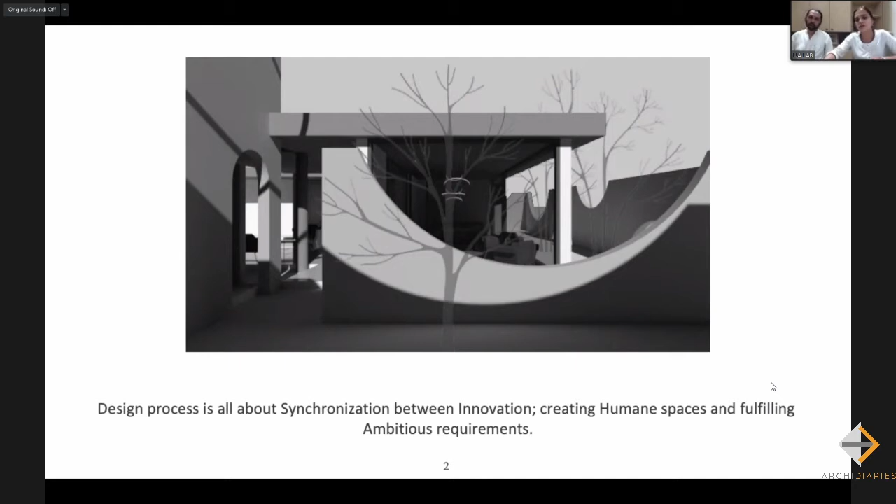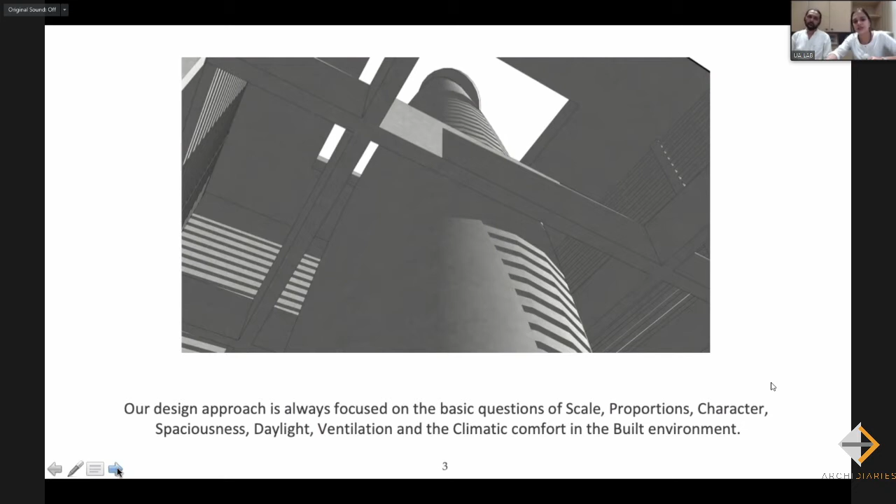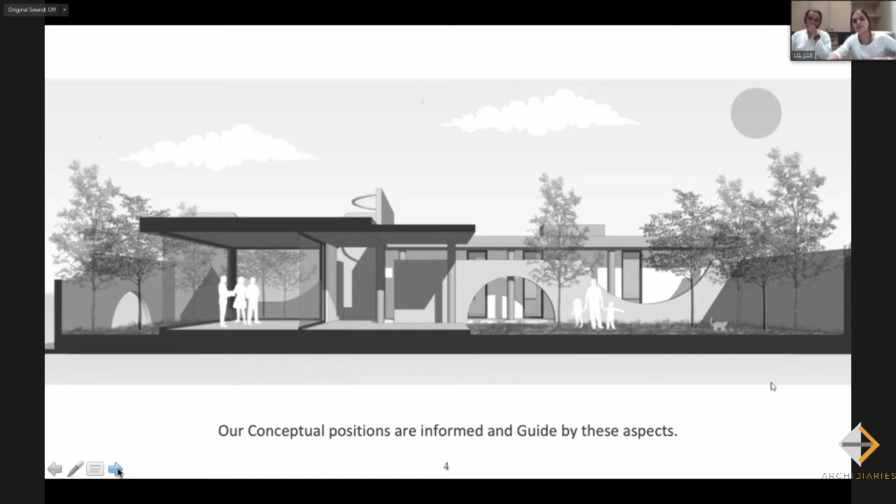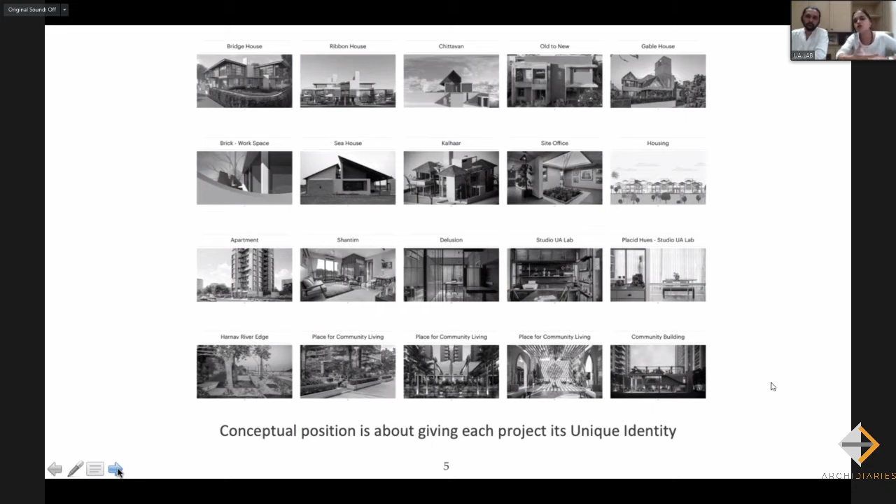Just one sec. And it is under this environment that each of the designs tries to shape itself and gets a unique identity. And this is how we try to work and develop a particular methodology for each of the projects. And this is a compilation of a few of our projects where it is more like an effort to create a unique identity, giving each project its value and its character in terms of its requirement and the context where it is placed. And here today for this particular presentation, we are trying to compile a few of the projects which are of varied scale. And in each of the projects, we are trying to discuss the kind of method that we have, that through a particular approach, what are the different methods that we try to evolve. And we use drawing as an important tool in order to develop these designs.

So the first project that we present to you is the Harnav River Edge. The project is about an urban park. It's in a place called Khed Brahma, a small town near Sabarkantha. This particular piece of land was actually used as a dump yard, and Khed Brahma municipality decided to develop it into a green space and park for the people there.

Harnav is also a non-perennial river, so the water can only be enjoyed during the rainy season. So it was a challenge for us to develop this particular place where water is non-perennial, and at the same time to create some interest value and an attraction for people to come here.

The way we started working on this design, the conceptual idea was evolving around the entire edge, which was parallel to the water body, and we thought that these linear pathways or linear strips could be of interest value. So the very initial sketch was to make these linear pathways which would run parallel to the river edge, and they can form interesting spaces.

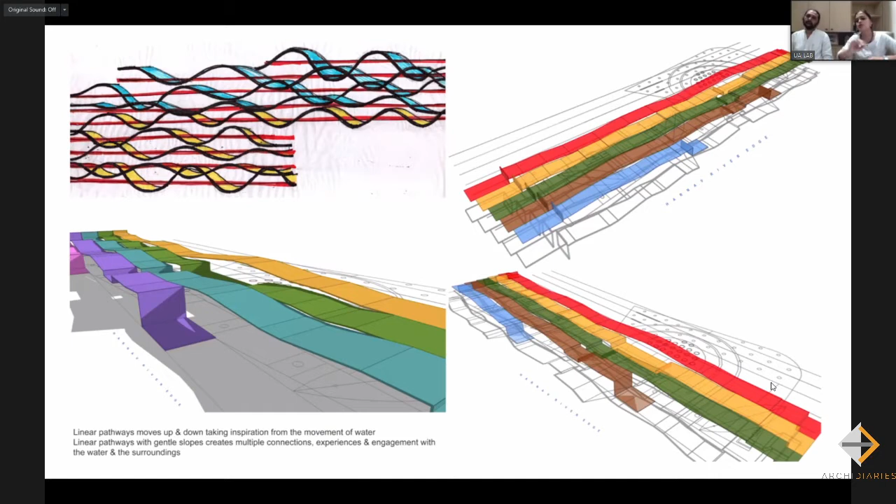If I link back, these actually are pathways which will run parallel to the water edge, and they form different kinds of spaces which are of interest value for walking. At the same time, they form different spaces where one could sit, and sometimes they get converted into bridges.

On the plan, it is a series of these linear parallel walkways, but it becomes quite interesting when seen sectionally. It creates different kinds of connections to the entire space, because one keeps on walking up and down through a series of these linear pathways.

We tried giving different pauses which would connect these linear strips together. Somewhere these pauses get converted into an entire lotus pond, somewhere there are pauses of green spaces, somewhere they get converted into amphitheaters. It is through these pauses that these linear strips get connected and create interesting spaces around the entire environment.

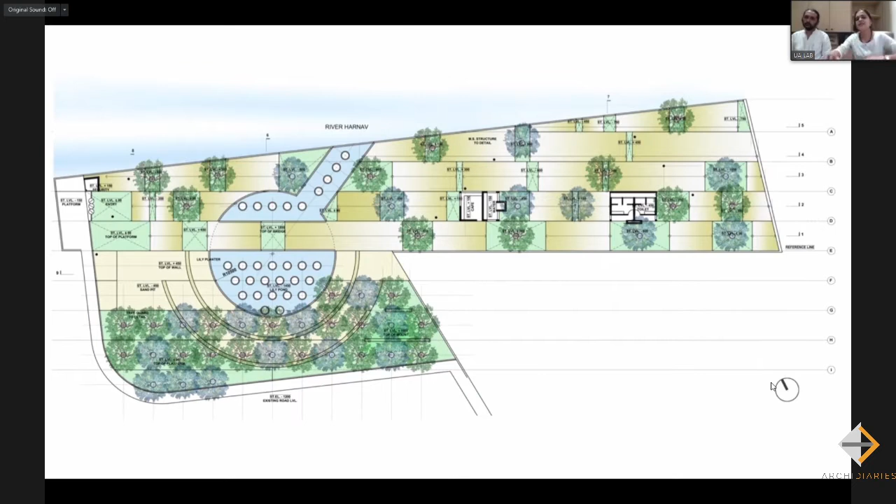It was interesting to solve this, but at the same time it was a big challenge, because the moment you put something linear up and down at different levels, channelizing water becomes a big challenge. There have to be valleys and ridges formed so that the water could be channelized.

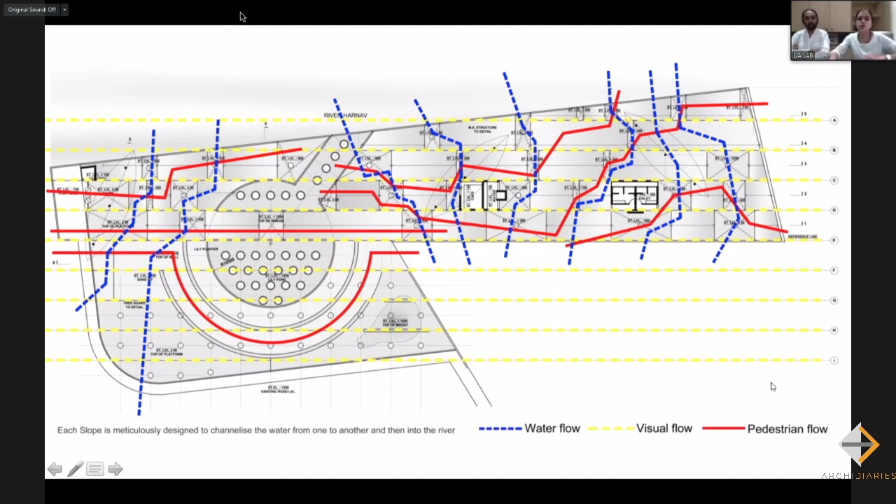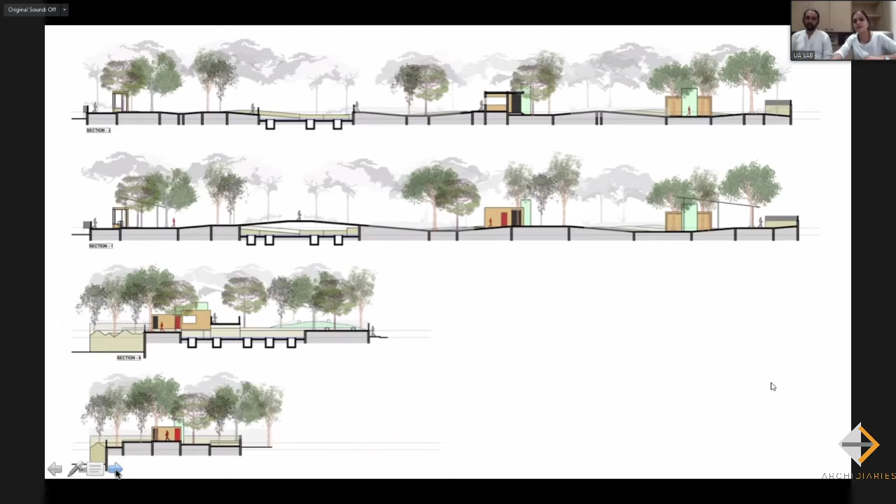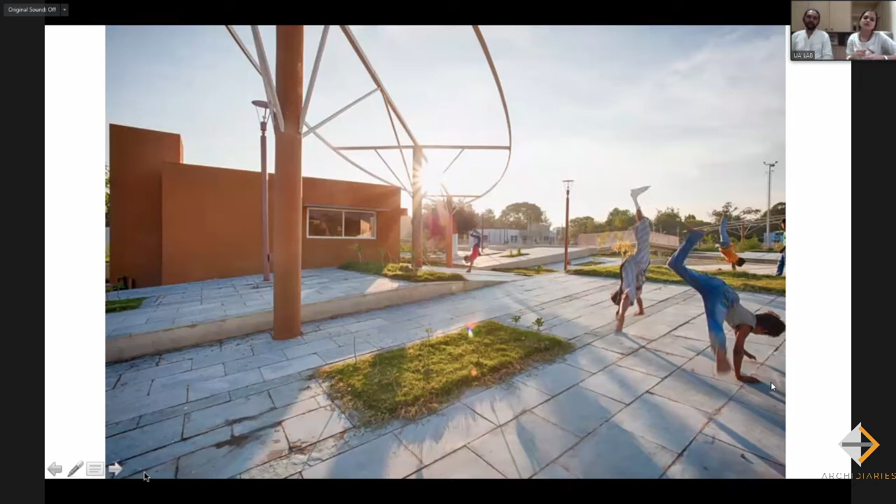This is the same place where also these pauses, the way they are designed such that there are all these linear strips that run parallel. And the space frame and the pauses are positioned such that they help in tying these linear strips together.

So even the space frame is diagonally positioned so that one can also move from one slope to another. It provides a direction for one to dissect through these spaces. At the same time, the space frame helps in tying these linear slopes together. This is a photograph of the same.

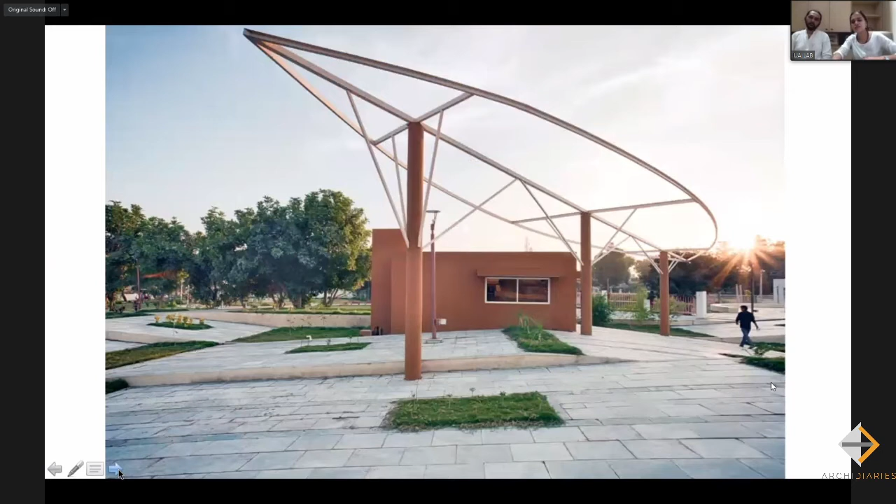These are the pauses that we were talking about, and these are the places where actually the water can get channelized and can pass from one particular linear strip to the other one. And so even if it gets collected, it can be used for those green spaces in the plantation area.

It's a photograph of the same where all these pauses and lawn areas are created. And this is the site where the Harnav River runs. It's a photograph of the same during the evening time.

And it's a park which is being used extensively because in Khedbrahma, most of the public spaces are more associated with temples. And this is a place which gives an opportunity to be like a picnic spot or even for kids to come. And it is because of this particular element, the entire park gets a new life or a new interest to come and visit this place.

Here, the second project that we would like to discuss is about community space. This project is in Ahmedabad, and it is about the community space in a residential complex. This project had a fairly simple client brief in terms of developing the open spaces in the residential apartments, in the residential area. As you can see, these are the buildings, and these were the patches of open spaces that were given for us to develop.

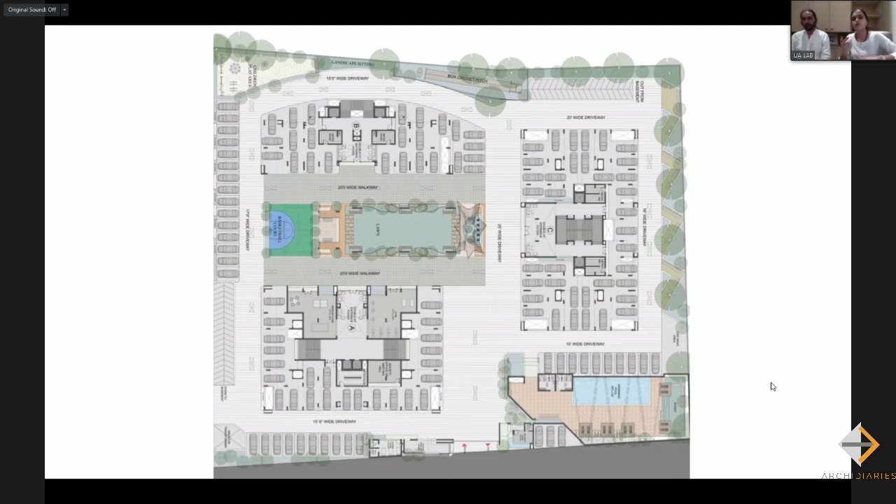However, I would just like to share that it was not all that easy, because if I reshare this proposal, the moment I take the hollow plinth areas, all the car spaces are the ones which I need to balance. Also, I need to rework on the entire ramp movement of connectivity to the basement. So it was not only about creating these spaces, but it was also statistically working on giving back the car spaces, because there are particular number of car requirements for all these kind of residential societies.

So in order to materialize this plan, we reworked on the entire vehicular movement. We changed the ramp, the position of the ramp, so that the vehicular movement also could be clearly articulated, and meticulously counted each vehicular park space so that we can take away the hollow plinth area to create semi-open spaces which could be connected to the garden. And this is how we were able to convince the client in order to give us some of the hollow plinth area which could be worked with the open spaces and lawn areas.

And then we started working on designing of each of these pocket spaces where there is an entire entrance. I'll get into the details of each of them one by one, and adding different activities and different zones, because these kind of residential societies have different age groups and they have different demands.

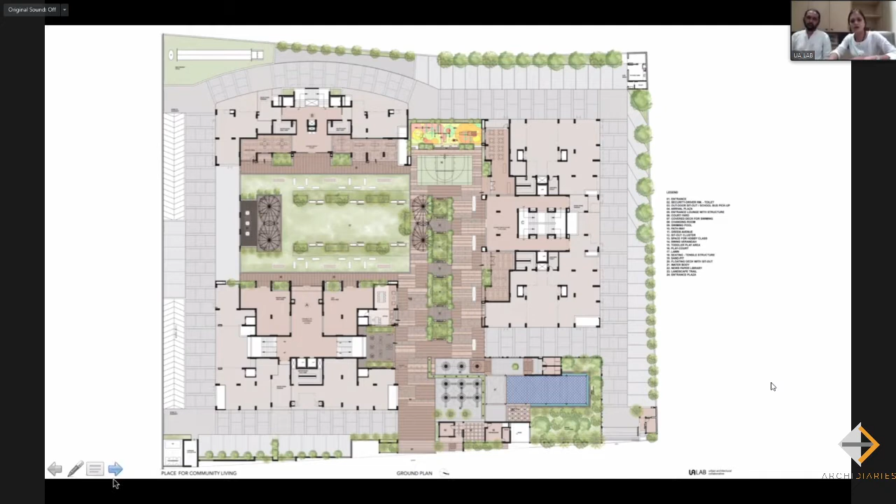However, it was pretty interesting, and we started going one by one, where we really enjoyed working on this, where we started taking each of the pockets and trying to detail out and give each pocket a particular identity in terms of water feature, or in terms of vertical planters, or in terms of more shaded green spaces, in terms of different kind of sitting areas that could have that identity. So people staying there will start associating these spaces with these kind of elements, and hence they can get connected more.

So this is one space where there is an entire water body in this particular area. You have the sitting, and then you have a canopy. It's a tensile structure, and there is shade there. And here, from the sitting area, one can actually have the entire vista of the central court. And on the two sides, you have the building. So this happens to be sandwiched between the building area. This is one pocket.

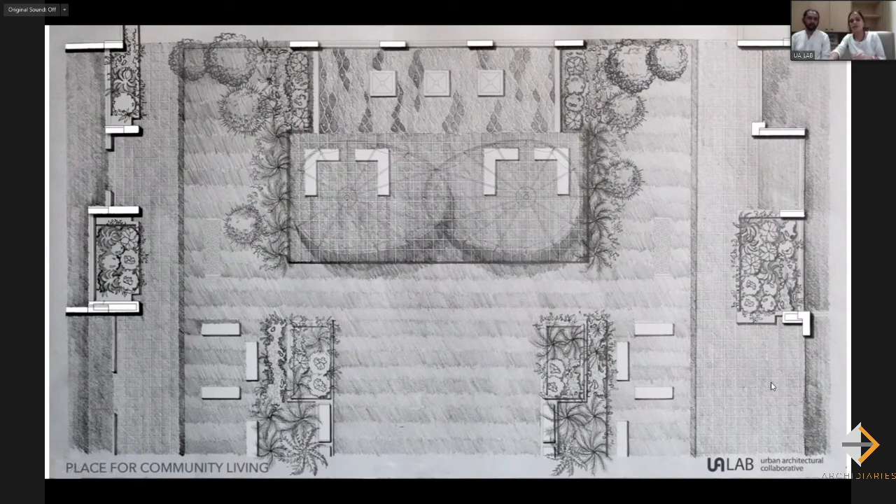This is the second one where it happens. It is directly at the entrance, where this is the security cabin area. And here there are series of vertical planters which are of different height, and hence the intershading creates a very interesting space in the front. And it also has plantations which are creepers. So and the creepers also have different flowers, and hence the entire place is not only shaded, but because of the vegetation and the colors and everything, it gets a very different identity.

And this is the pool area, where obviously the swimming pool area in the residential society also requires different kinds of privacies, different layers of privacies, which we were able to achieve through the thick plantation. At the same time, plantation also adds value to the entire water feature.

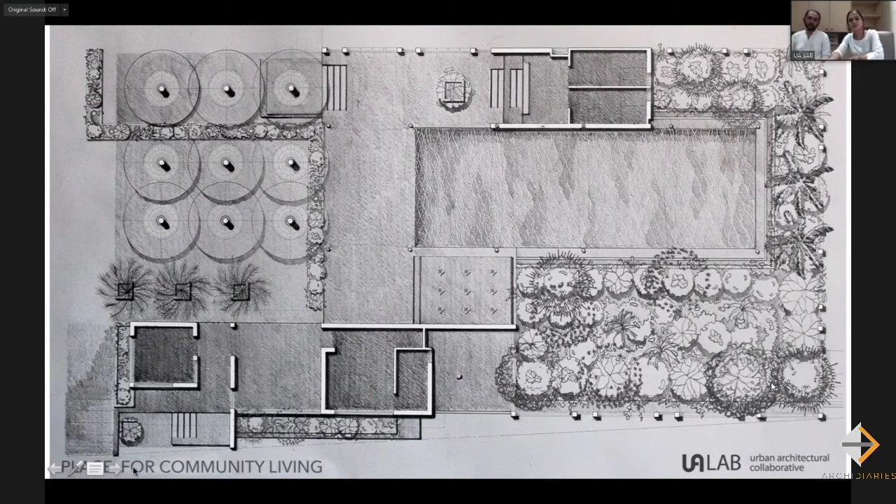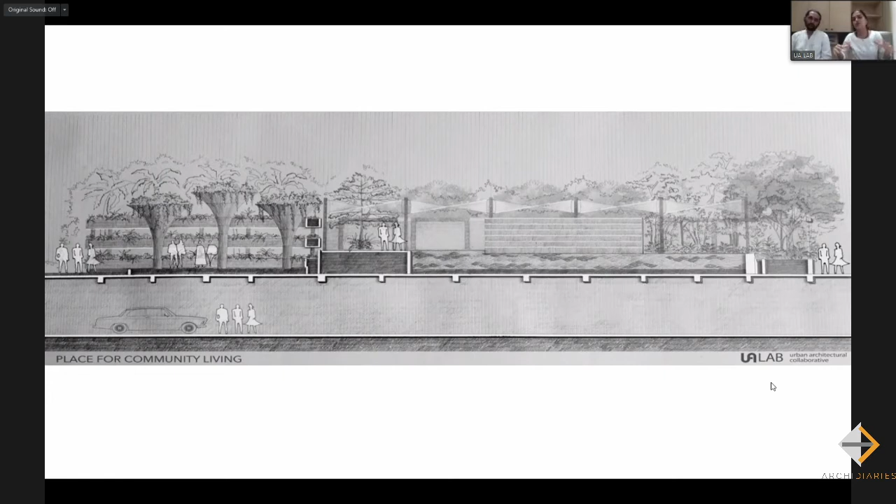Here, I have specifically shared this drawing. This is the entrance area drawing, where there are a series of vertical planters in this area. There is the swimming pool over here, there is a thick green, and this is the entire security cabin area.

Here at UA Lab we use working drawing as an important tool for design development. It is not only a drawing for construction, but working drawings are a tool through which the entire design starts developing. At this stage we were very clear not only about how the entire structure will come up, but also about each and every pattern the flooring will take, the pattern that will come up on the vertical walls or on the frames, and what materials will be used. It is through this language that we are able to harmoniously connect all these spaces together.

So initially, when I shared that it is about integration, integration is not only about physically connecting it and making a whole space, but also about connecting all these verticals, horizontals, small spaces, big spaces, having a similar language of material, patterns, and color palette. This ties the entire space together, though they are happening at different levels and positioned at different places.

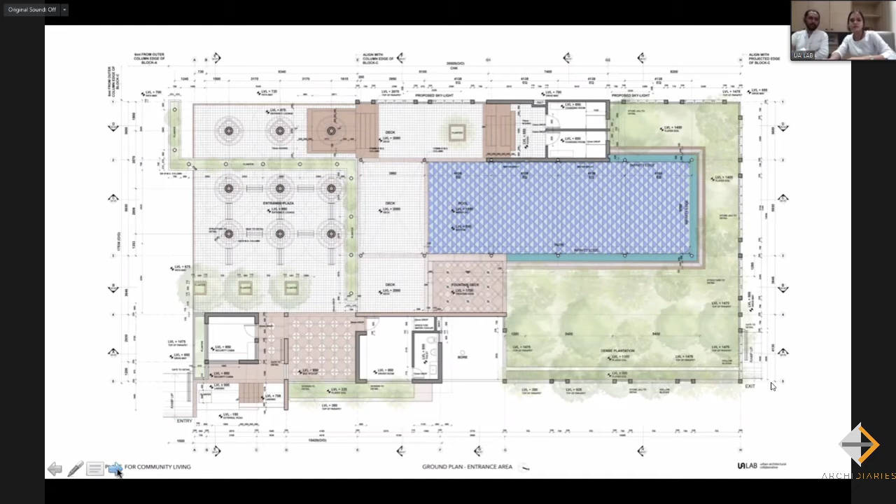The creepers and vegetation are specifically selected to be of hardy varieties. They remain green throughout the year and are low maintenance.

As I was sharing, the working drawing stage is the most important stage for us. It is through this that we try to develop the design, and this drawing specifically shows how any pattern on the floor ties together, and similarly how the pattern happens on the vertical part. These are the vertical planters, and these are the fins, where part of it encloses the swimming pool and part forms the compound wall for the society. Everything is resolved at that particular stage, which gives a holistic value to the entire project.

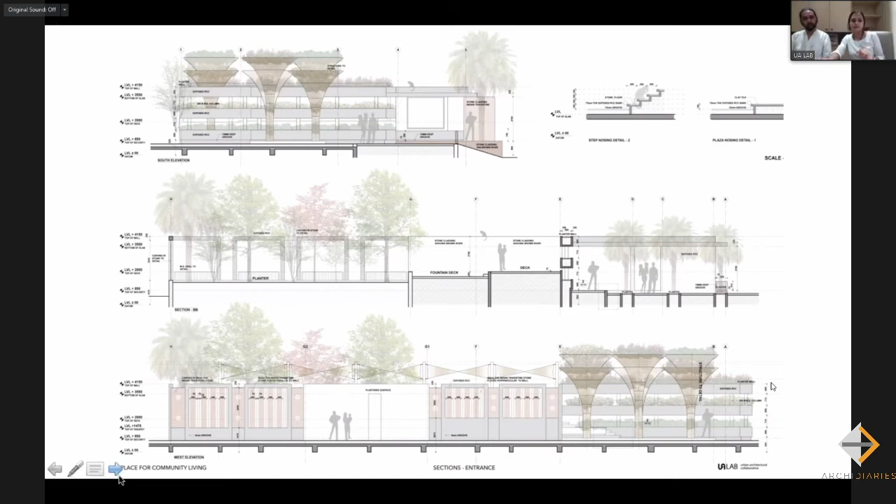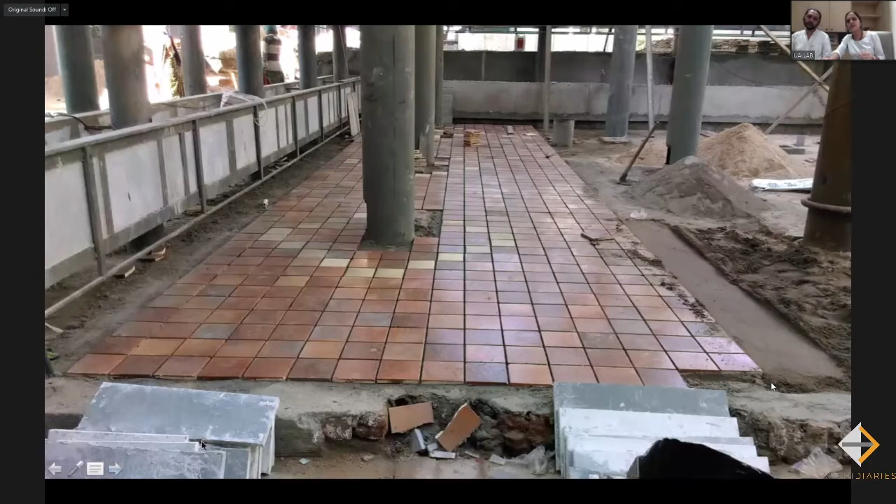These are some of the photographs during the construction stage, which I thought would be interesting to share. These are the fins, and these are the handmade tiles, and these are the vertical planters.

This is the swimming pool area, and these are the walls with stone cladding. This is a central lawn area with planters and sitting, and this is the water body, where here too I would like to share that the patterns and the size of the tile are all decided so that it holistically links to the entire project.

Even here, below it is the basement, so we have to provide light to the basement, so there will be cutouts in that slab for light and ventilation. These are the cutouts we have provided in the slab, and we follow the same pattern in these cutouts too. There will be a jali on top, and the jali has the same pattern that is used for the stone cladding.

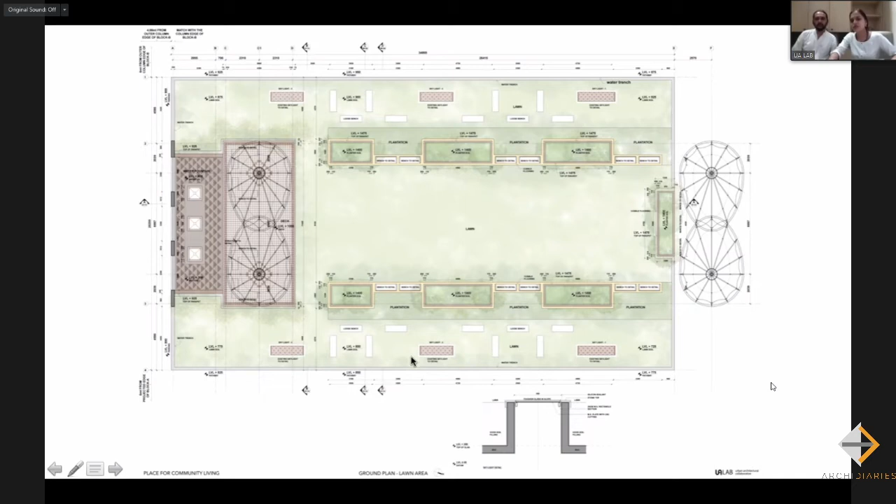The pattern that is on the jali, which takes light from above, the same pattern is repeated on the stone cladding at the backdrop of the water body. We were quite clear from the beginning that the patterns are not arbitrary. There is a selection of a particular pattern, which is scaled up, scaled down, and combined together to make another design, but in a way they link together.

Everywhere, whenever you are moving in the entire community area, you are able to relate. So it is not something that arbitrarily comes up. Whether it is a floor, a screen, or something on the stone, they all have similar kinds of motifs with different scale and proportion, combined together to form a different pattern, but still the concept is the same.

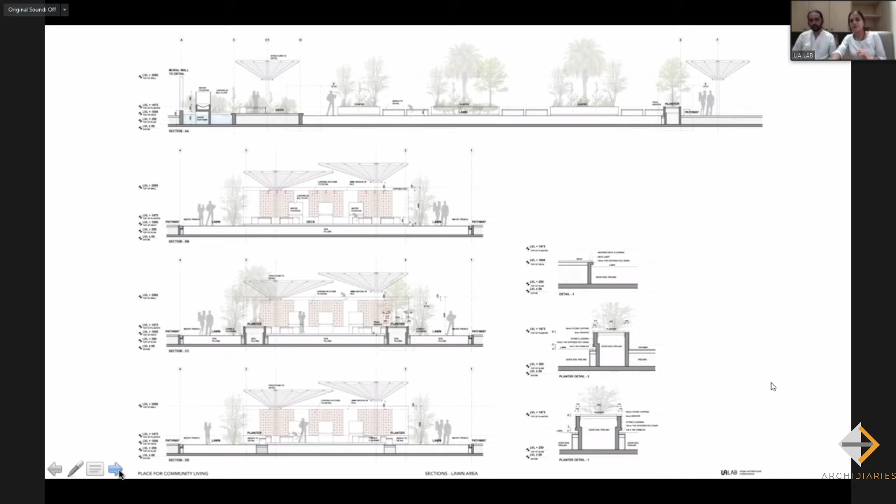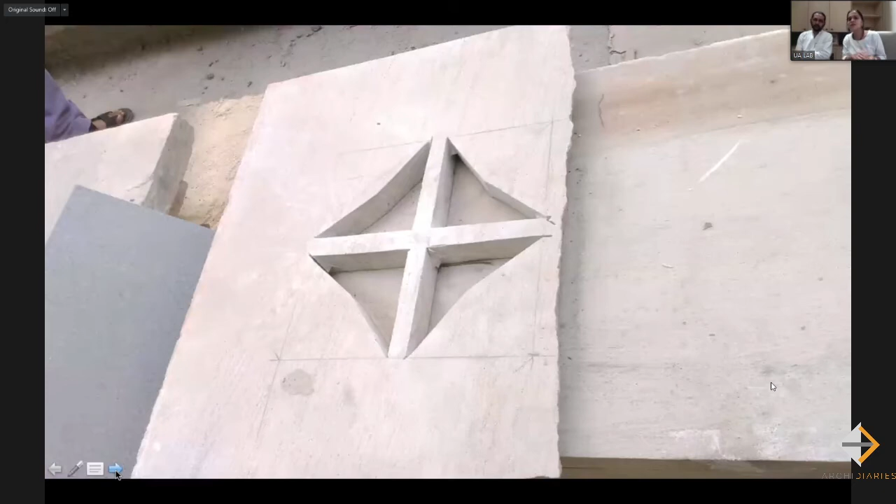This is the stone, again Indian travertine, and this is sandstone on which the carving is done. This sandstone has been used for the vertical cladding, and this is the backdrop of the water body.

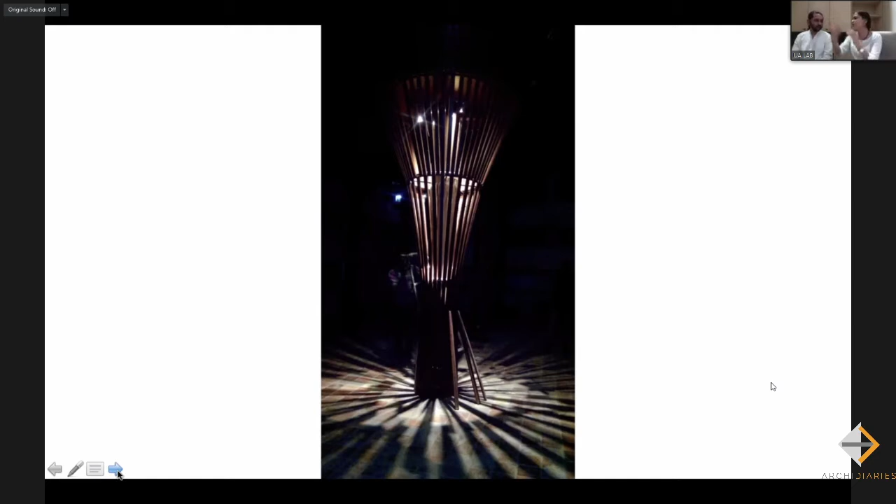So the height of the light should be placed a certain way, and that's how, at the end, we were able to get complete light circles for these vertical planters. The light fixtures in each vertical planter are positioned at a particular height, so that each one has a good circumference with a good spread, and the entire lower surface could be interestingly seen.

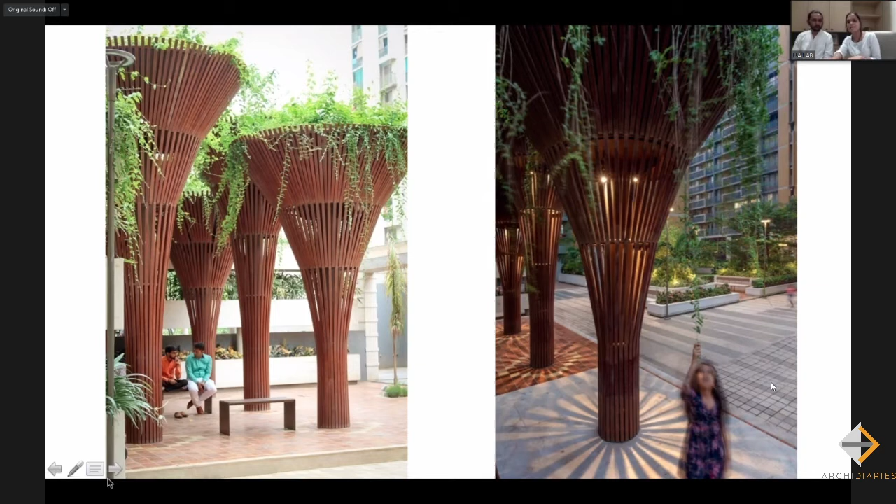These are photographs of the complete project, the same one I shared during construction when we were able to see just the planters. It's also because of how the vegetation and plantation is selected, based on different heights. This means at eye level, one is always able to perceive greenness, because there are varieties of heights for each plant species selected, based on the heights they grow when mature.

These are the pockets of sitting spaces, and even the pattern that is on the flooring here is the same pattern repeated in the entrance area.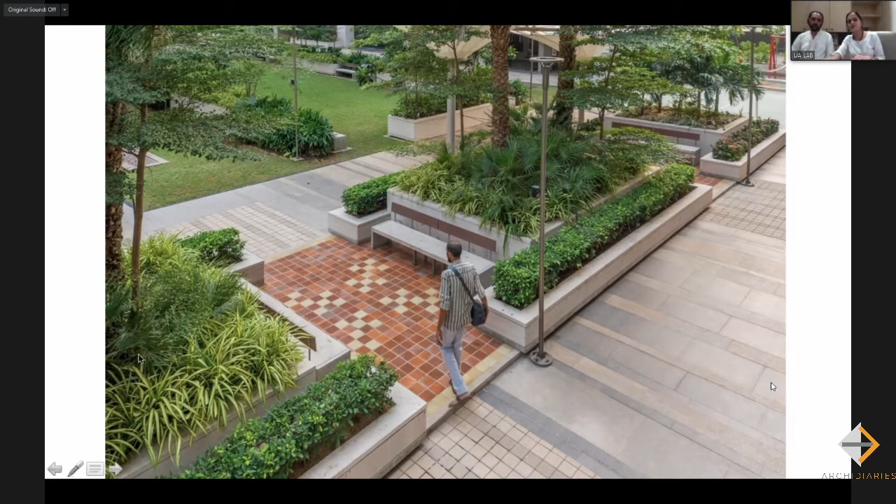This is the main lawn area, the central lawn area with the water body that I already shared in the beginning. And these are the planters which are taking the bigger plants and shrubberies.

And these are the hollow planes which we had convinced the client to take. These were initially reserved for parking. And eventually we were able to convince him, and these hollow planes are used as a swing area now. From this area you can directly see the central lawn area.

Also, just to add on, all these backdrops, we ended up using jali because it's good for air direction there. So there is a parking that happens on the rear side, but we have not gone with enclosing it with a solid wall. There are all jalis that are made. So all these hollow plane spaces are completely airy and have good ventilation throughout the entire day.

These projects that we shared were more like community spaces, parks, trying to cater to lots of faceless clients where the requirements are more generic. And now I move on to a specific private residence, a project called Gable House, which is in Ahmedabad. Here also the requirement is fairly simple: the client required 3 sleeping spaces with living, formal drawing, dining and kitchen spaces. The plot is a rectangular plot, and it sits at a cul-de-sac.

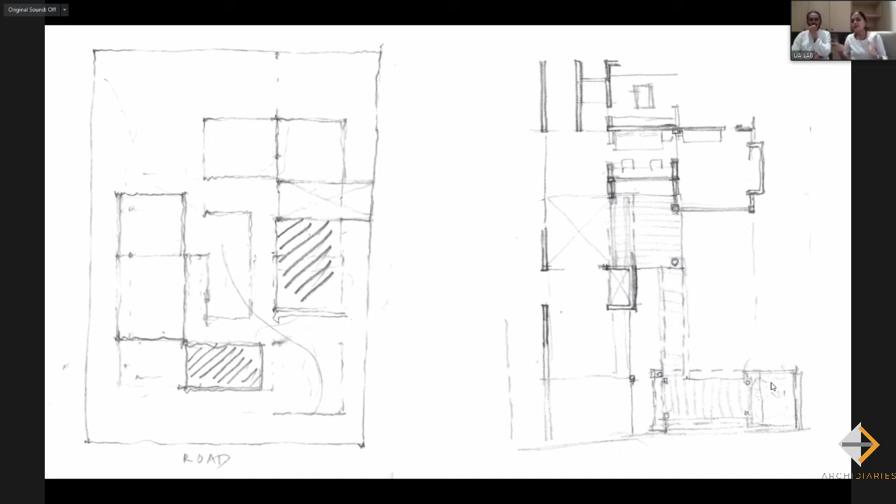And these are some of the options of the same. Normally when we have a project, both of us work on different options. This was one of the options that worked out really well that KK worked on, where the entire linear mass was punctured in the middle and green spaces were taken in. This middle space is where the mass is punctured, and open spaces are created on both sides: on one side it happens to be the garden, while on the rear side it happens to be a courtyard.

And this space ended up becoming the most important space where, with double heights and single heights, we thought it could end up into a very interesting volume. As that space was open, taking green from one side and having a court on the other side, it could have more daylight through the entire day and be a more interactive space. That's how we thought it could become a family and dining space, the spaces we tend to use during the entire day. The front side would take the formal spaces, while the rear side would take private spaces like sleeping spaces, kitchen and utility area.

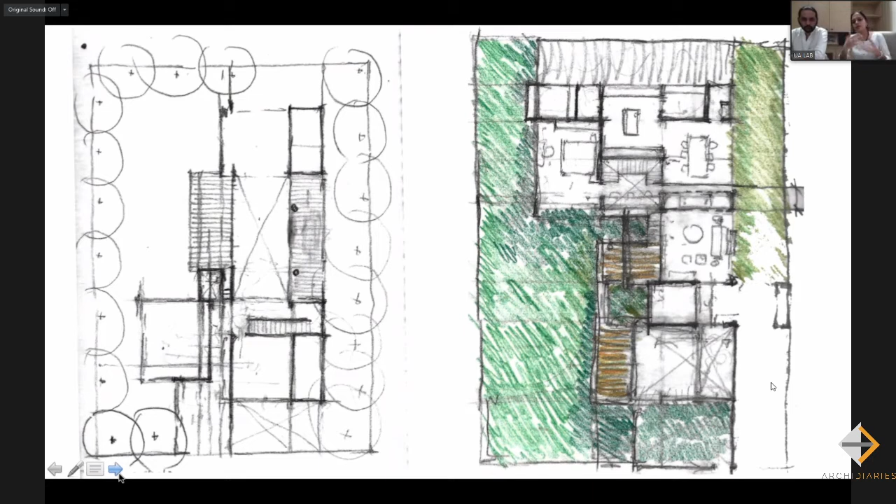These were part of some initial design process and exercises. What eventually ended up was a layout which is more linear, having a good strip of green which runs parallel, and a parallel mass taking all functional spaces of the house: in the front there is a living room area, followed by an entire double height volume which takes the family space and the dining, and on the rear side is a kitchen and then a bedroom, a sleeping space. And that's how the plan got articulated.

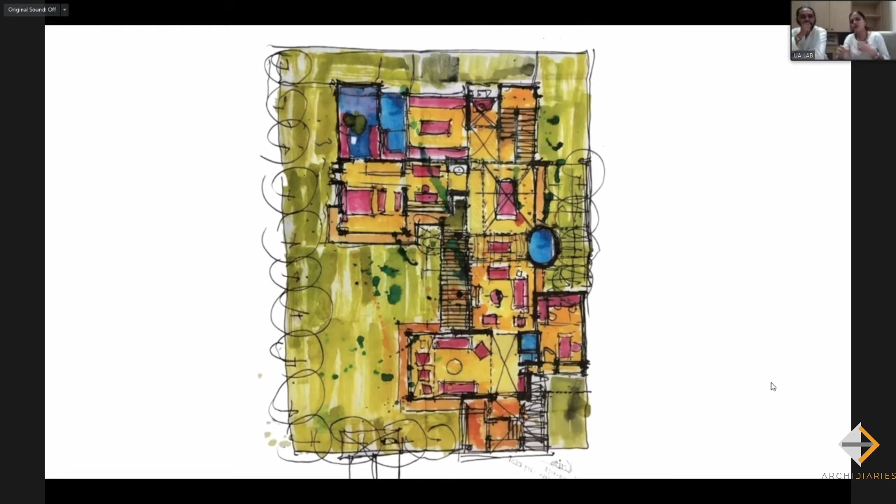It was also during this stage, while we were working on the plan, that it was clear we were able to get a series of single height and double height spaces. And we wanted to use these double height spaces to our advantage in creating interesting volumes within. This is how we started, where sometimes MS could be used to create interesting volume, different from something like a flat roof. And these are also some of the explorations of how the section could be worked out for the single height and double height spaces.

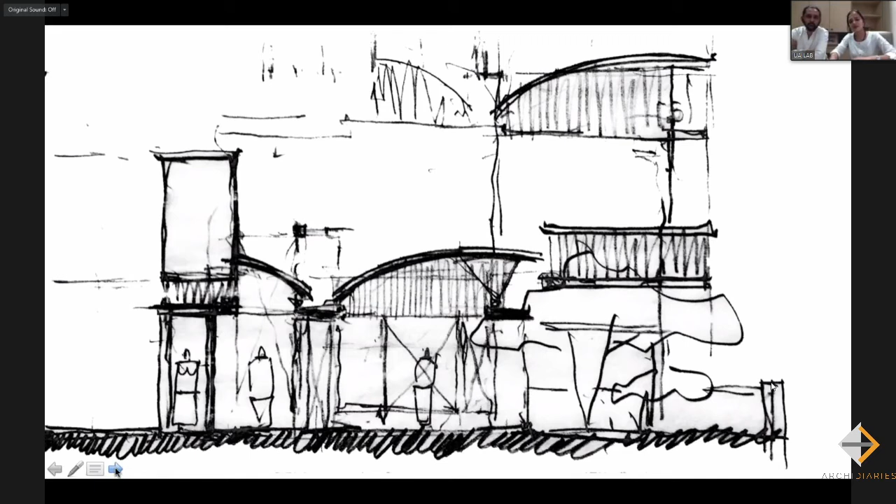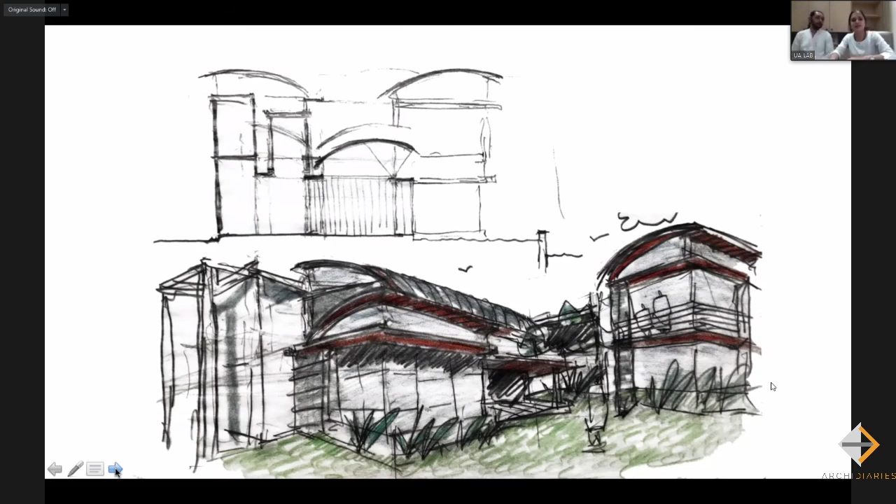These were some very initial sketches in order to work out how the entire volume could be shaped up after getting double height and single height spaces. And eventually,

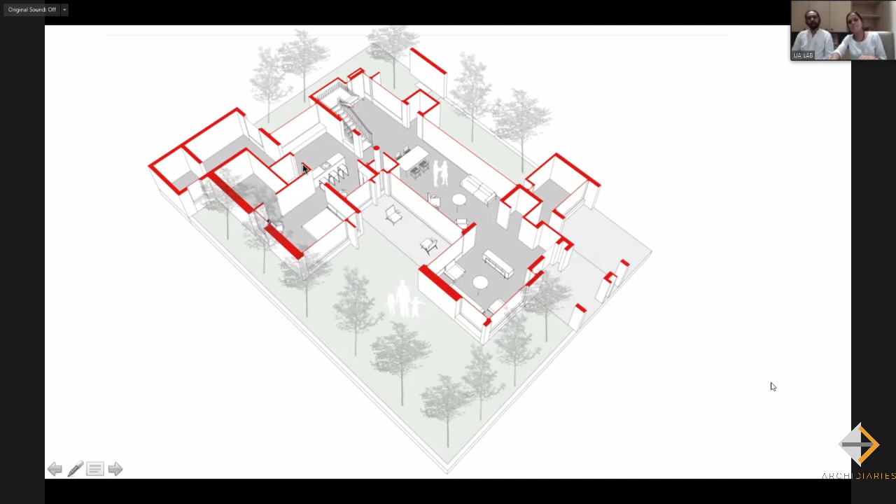And as I shared earlier, we really wanted to explore the entire volumetric dimensions. We ended up with the gable roof, and these gable roofs were designed more like floating roofs, where the entire front mass is lower, and as one goes deep in, it gets double height. And then in the front there is an entire tower, which is a vertical tower.

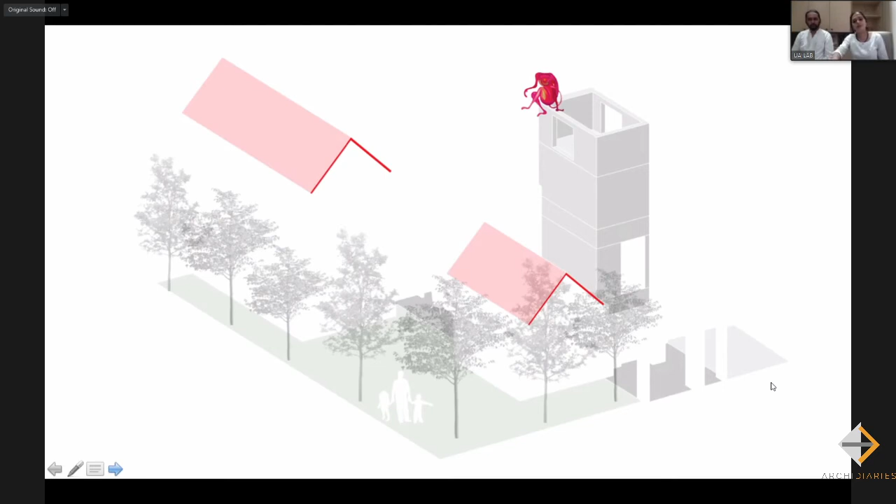So what I'm sharing in this section is that there is a contrast right in the front elevation of the entire house, where there is a single height space, and then it is connected with an entire tower which is almost triple height. And this creates a very interesting volume and interesting form from the street side.

At the same time, from the inner space, the living room gets a different scale because of the single height. And this particular area is where one actually enters into the house, and you are in fact greeted by the entire triple height space. This is a drawing of the same, where we are able to see the living room space and the entrance area.

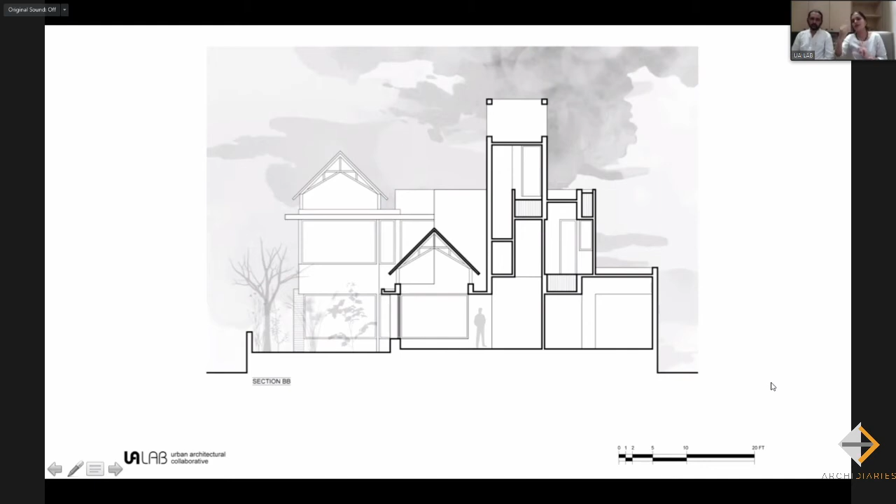And this is the front elevation. And then as one goes deep inside, there is a double height where the upper story becomes a bedroom space. However, in the front mass only the living room and the entire triple height tower are seen. And it is on the rear side that the entire mass is loaded.

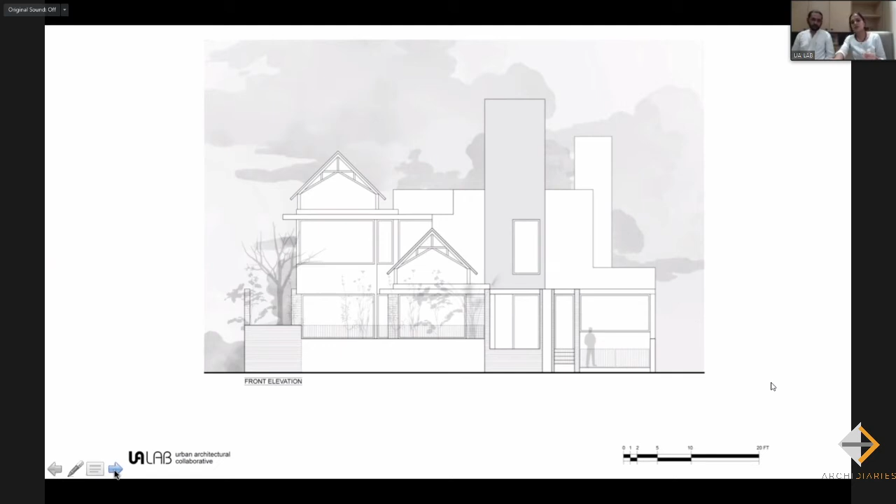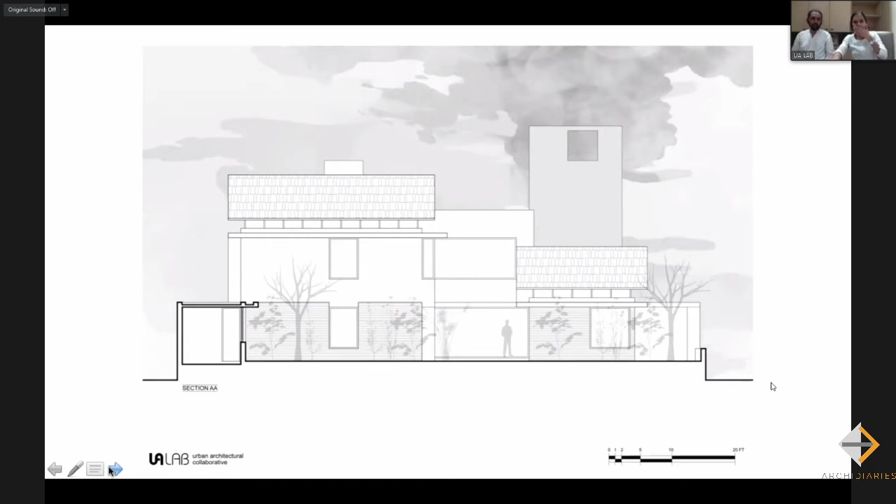This is a section across where one is able to see the different heights and different levels. But what is interesting is that though having a good volume and a good floor plate running parallel, in the front one is able to see quite a sleek volume of just the living room and the entire triple height tower. And it is this volume that is embraced and held by an entire green garden that is over here.

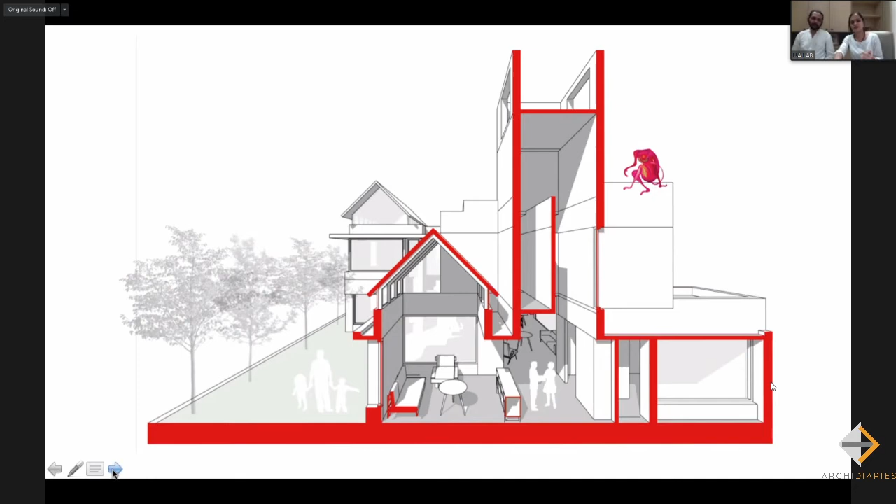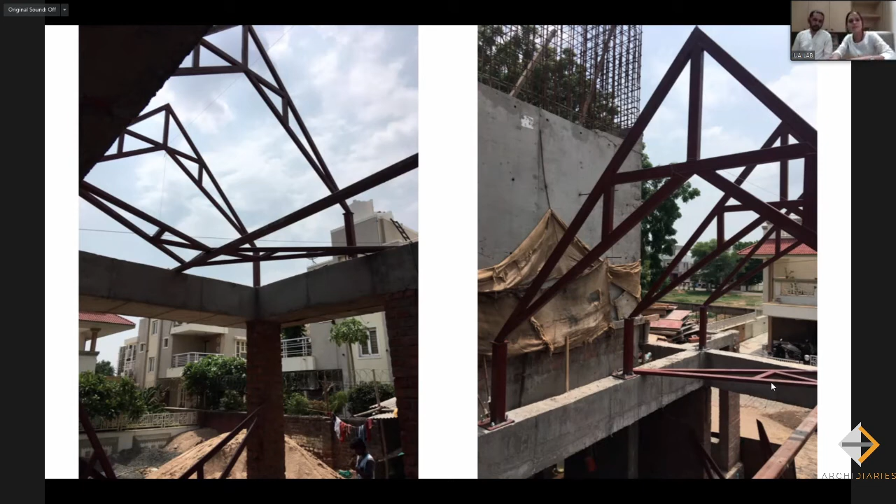And this is an exploded view of how the roof sits and creates interesting volume within the space. Here, I've just tried to share certain photographs during the construction stage, when the roof truss started getting erected. And we have gone for a scissor truss so that we can get interesting triangulated volume within the living room area, and the same thing happens in the bedroom area on the first floor.

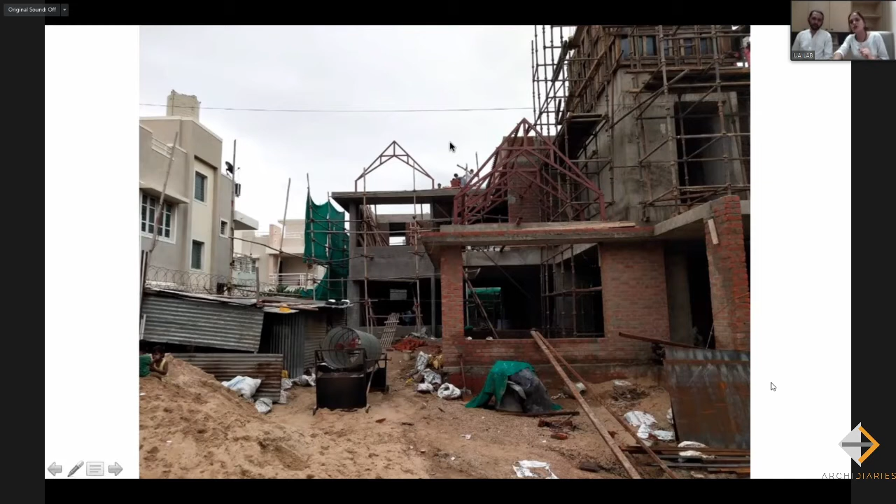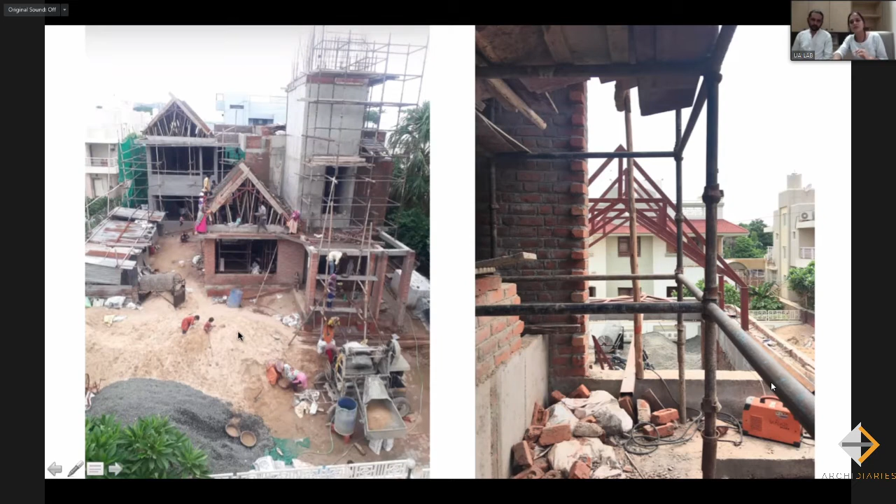And this is also during the construction stage, after the truss gets erected, the entire shuttering happens to take the sloping roof. These are the photographs of the same. And also, as shared earlier,

we really wanted to take advantage of this sloping roof, where the triangulated volumes within are really interesting, but at the same time, when it meets the wall, we wanted them to be floating, and hence there's an entire window slit given at the edge where the eaves end. I'll share the photographs of its completion, where one actually feels as if the roof is floating, because the eaves are not

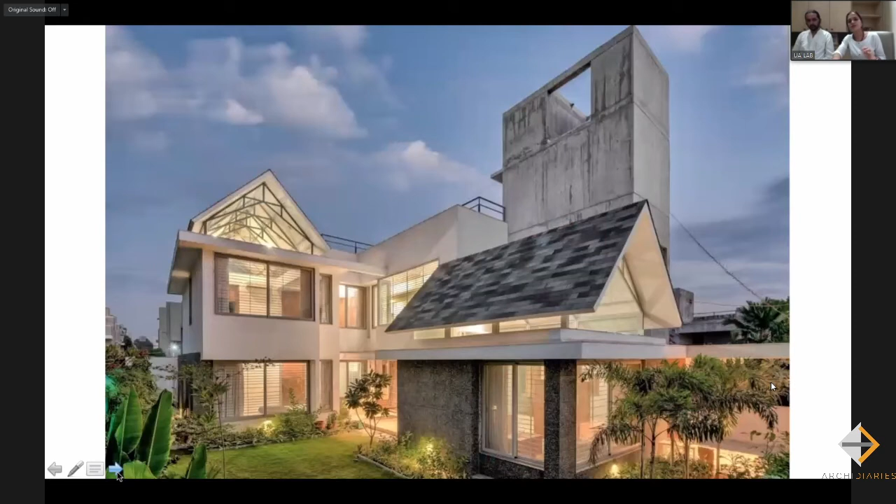connected with the wall, and there's an entire edge at the base with a window, and these windows have clear glass. So you have light coming throughout the entire day, which makes the entire space feel experientially very different. These are the photographs of the same, where because of the glass at the edge, or better said, a space, one feels as if the entire roof is floating.

And these are the photographs of the inner space, and it is because of the gable roof and keeping these eaves free that different shades of light are available throughout the entire day. At the same time, on both sides of the gable roofs we have kept fixed glass, so that the light enjoyed during different times of the day and during different seasons is also very different.

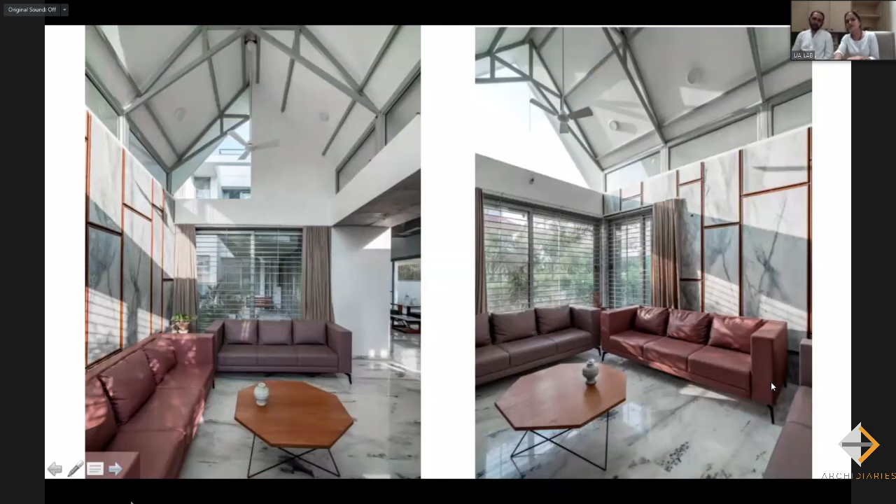These are the photographs of the living room area. As you can see, the play of light and shadow. And also, there are jalis and trusses and many other elements in this space, which cast different light and shadow in this entire volume, which makes it quite dramatic.

So when we visited this house, I think it was during January, and even when we visited it recently, all these lights and shadows, the shades and plays, look very different. And hence the entire double height volume, or even the single height volume that is created, looks quite dynamic. And the color palette used in the entire house is exposed RCC, plaster wall, wood and natural materials. So it is because of that one is able to actually experience this light and the entire play of shadows.

And this is where I would shift to a different scale, where this particular project is our own studio, which we had initially started within our living space. It is more like an interior design scale, but I would like to share that the decisions taken at this scale, and the approach and method here, are very similar to the method we adopted for the community space or the parks that I shared.

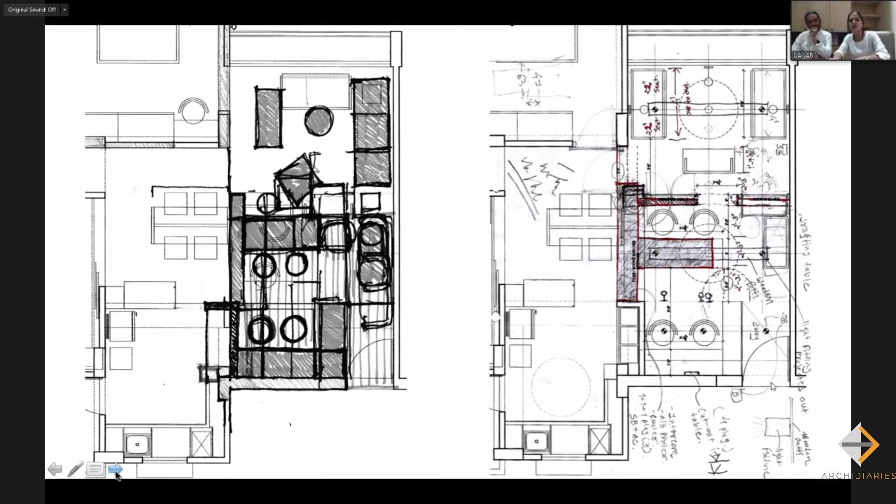We started working on lots of layouts. Eventually, we removed all the walls and tried to create an open plan of envelopes, creating frames and envelopes, where there were frames which were transparent, porous, and solid. Then we tried to make a permutation combination of each of them, so that somewhere they could become a store space, somewhere a table making a usable space, or somewhere they could just divide two spaces.

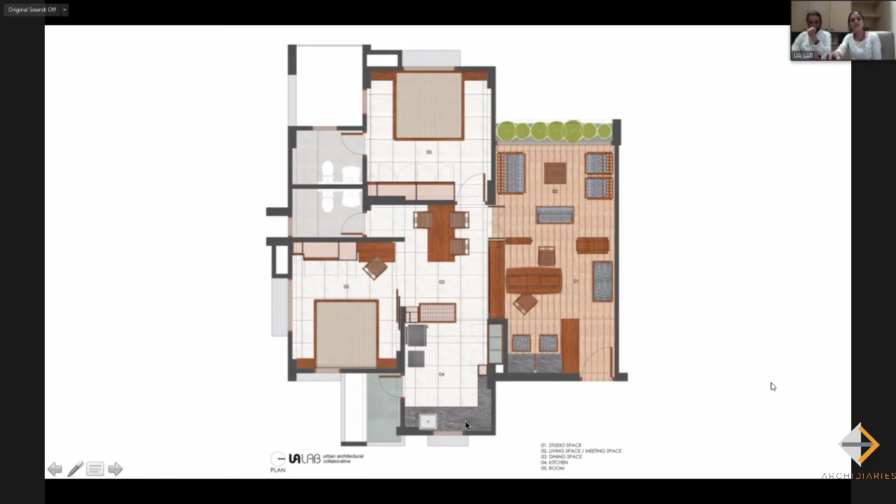Eventually we ended up with this layout, which is quite simple in plan, but it was very interesting when we started developing it one by one. This is a sketch of how the partition would come up, where we wanted the entire partition or vertical frame to be something like 2 meters without any vertical middle support member. That was also a challenge, because we were quite clear about the size of the wooden member we would use.

Even in this case, we were very clear that we wanted to follow a similar wooden member size for the furniture, the vertical frames, and the tables, so that there is harmony in the entire space. And because of that, it's a 1.5 by 1.5 inch member that we wanted to use.

And hence we started with this series of sketches, so that through the same cross section we were able to design different partitions. Taking you through this series of sketches, we wanted a partition that would span 2 meters. Here it was difficult to span with the middle member, so we designed the entire store. The entire cabinet would act as a beam, having a counterweight, so that this entire 2 meter partition could stand stable.

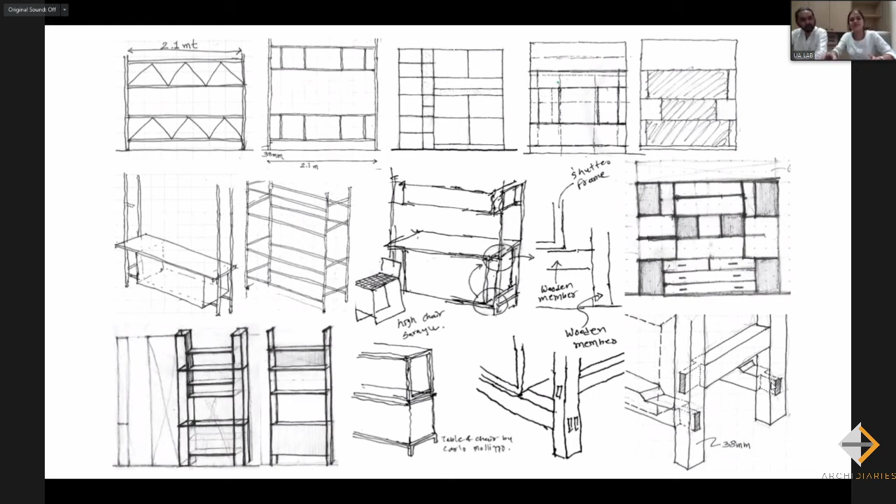And also, right from the beginning, we were very clear that we were going for nailless joints. It is going to be a tenon and mortise joint with fingers, so even that was a due consideration. That's the reason the number of bracings also increases, because we're not going to use nails anywhere. We were quite clear about these decisions before doing this, and that's how these sketches started developing and shaping. And here again, I would like to share that working drawings are the most important tool for us for design development.

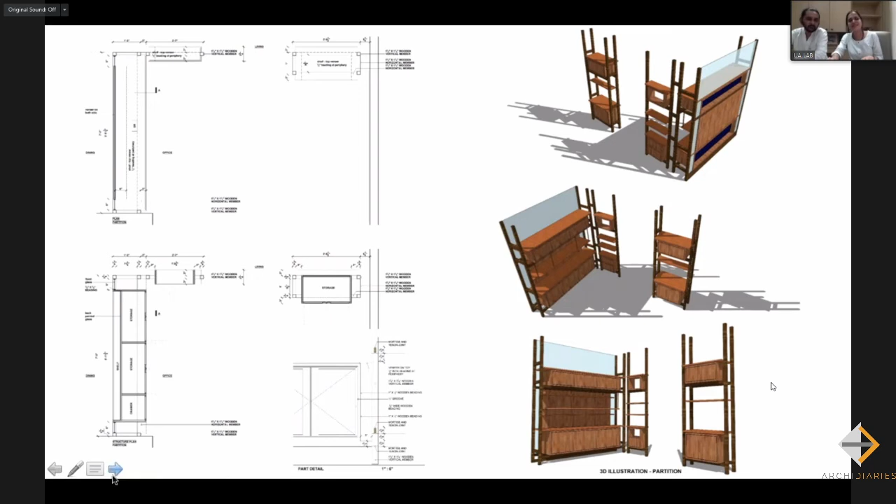So all these drawings were meticulously made before we started working. We had already completed all these drawings, and each and every size, cabinet, beading, putty and everything was already designed. The drawings were clearly made before the mistri came in and started working. That's the reason I thought to share these drawings, where we are quite clear about each and every beading that is going to come, how much that vertical is going to span, the size of the shutter, where the groove is going to come, where the bracing is going to come.

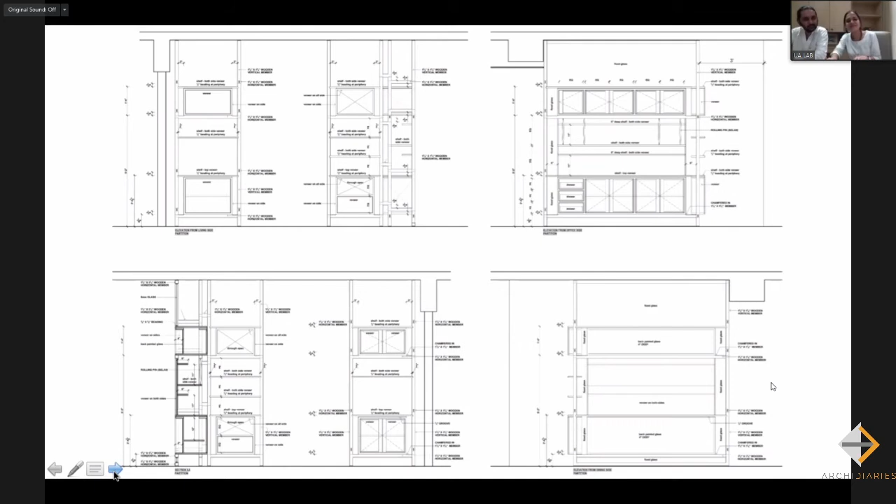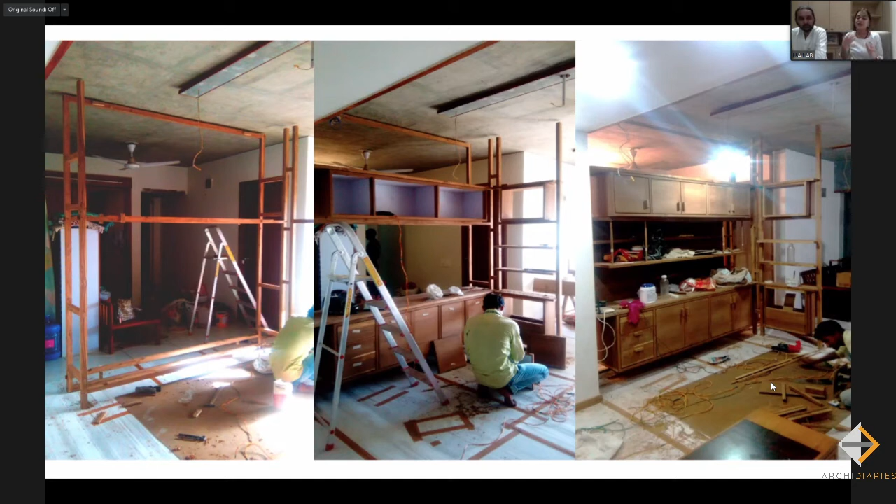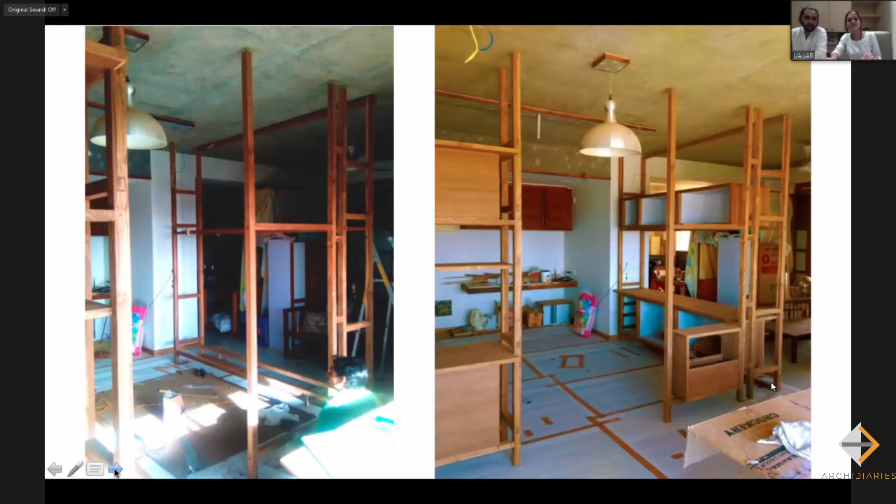And by keeping it free from the ceiling and free from the floor, these frames are more like envelopes, but you are still able to see the ceiling continuous and the floor continuous. So the light was never stopped. In spite of adding so much to it, the space still had that spaciousness, which we were able to achieve even after these designs. These are the photographs of the same, with the same wooden member, and these are the final photographs of that 2.1 meter partition.

It's the same, and we tried to accommodate many things here. There is a swing, there are workstations, and these are store units. At the same time, there are vertical niches and horizontal niches, and everything is connected through nailless tenon and mortise joints everywhere. And I think it is through certain decisions that we did not compromise that we were able to achieve this spaciousness in spite of adding so much to the same space.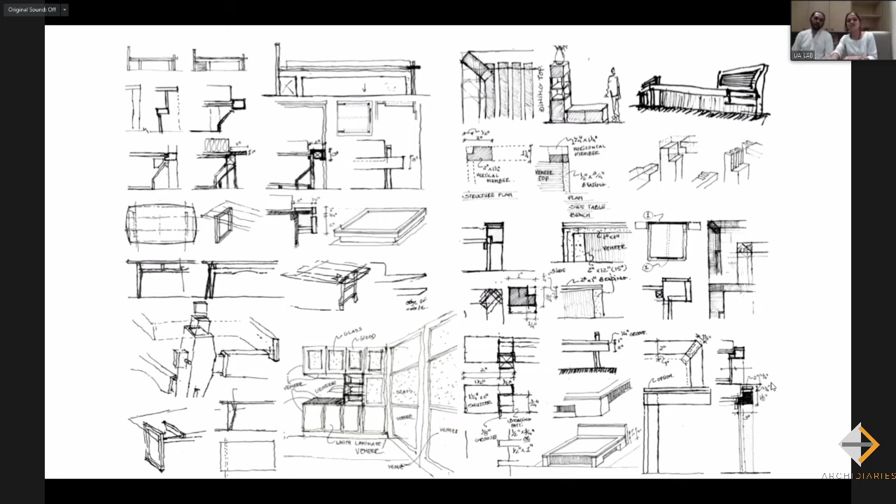These are the sketches of the same. Some are about the tables, some about the bedroom and the bed area. In the bedroom, one bed is with the storage unit, the other bed is bottom hung, but the size remains the same. So even when you move through the entire house, there is a harmony that one is able to sense. Or whether it's a dining table for that matter. These are the sketches for the same, where even in each sketch, there is a clear indication of where the beading is going to come and which is going to take the wood.

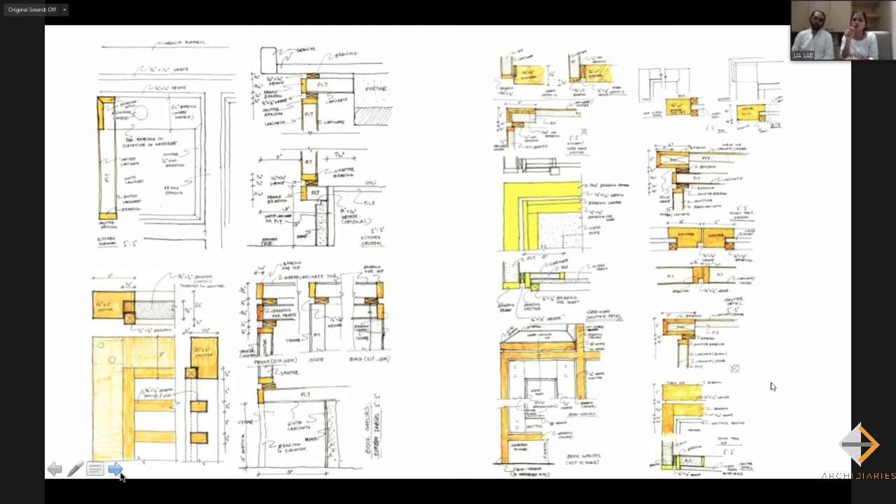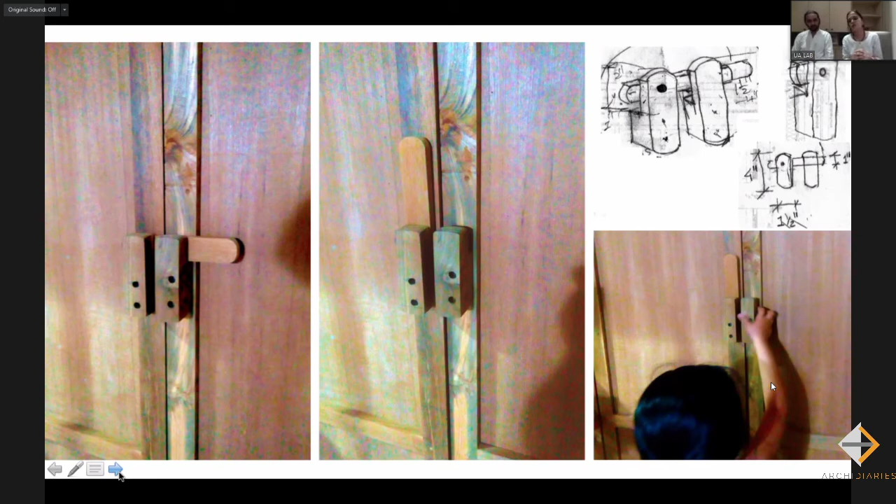And you can close the door. It's a door stopper and a door handle also, and it can be operated from both the sides. I can operate it from this side. Similarly, I can operate it from either side, and this is the same thing that we have used. It's a photograph of the same.

The last project that I would share in the series is we have just extended the studio, where Placid Hues is the extension of Studio Lab, where it is more like a formal space where we are. And this particular place is in a way, yes, an extension because it is actually just 5 minutes away from where the Studio ULab used to be.

And so we see it more as an extension of the physical space, where this particular studio is also in a commercial complex. It has got offices around, and the challenge here was to, through design, get that experiential spaciousness and the quality of light and ventilation in this kind of commercial complex. And that's what was the struggle.

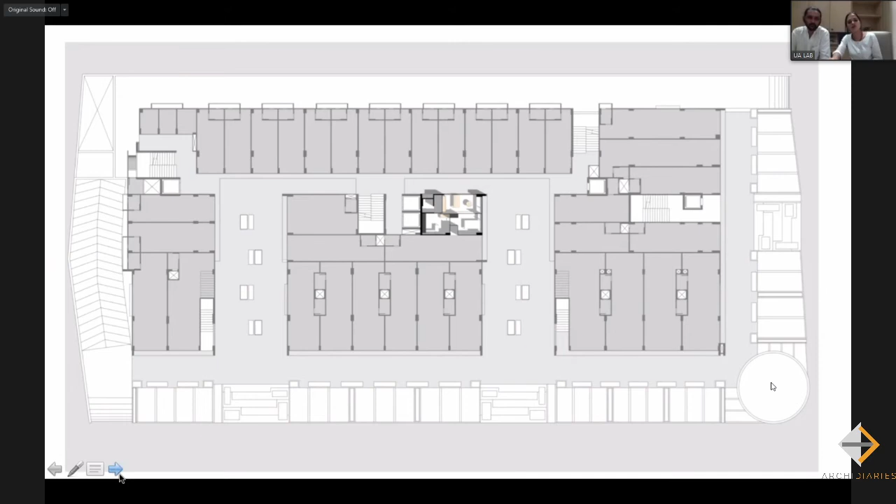And at the same time, we still wanted the open plan where everything is one, but still there are spaces which are defined, and hence it has also got flexibility to combine together and become one, and at the same time work as alcoves. So here it happens to be on the 4th floor, where, as I shared, it's a fairly simple commercial complex with offices all around, and that's where it sits.

And here too, we wanted an open plan where it is just through these series of different envelopes, more like cuboids and vertical planes, that one is able to divide spaces and create workstations or sitting spaces. And at the same time, the light should not be stopped anywhere.

And also we wanted to try a different material this time, and hence we've gone for birch ply, where the light and the quality when the light falls on the birch ply is also very different. So we wanted to use a different material from what we used in our earlier studio.

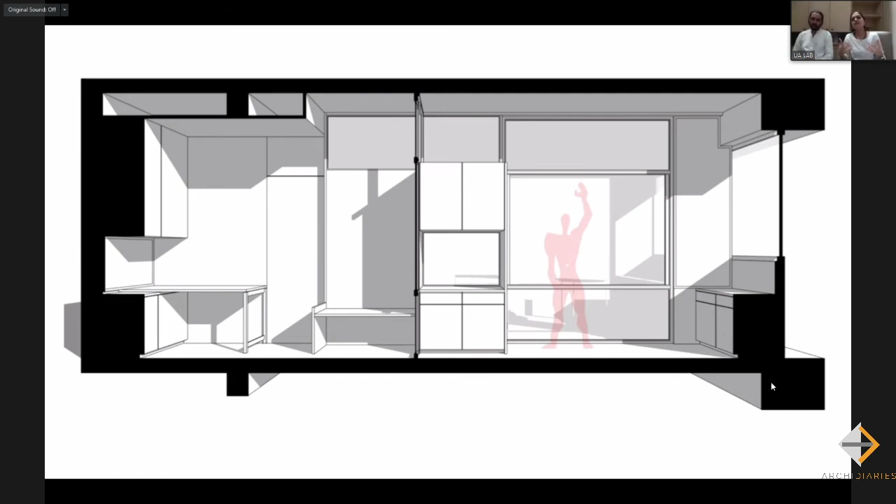These are the sections of the same, where actually this space is the one where we are sitting presently and presenting, and this is our workstation where the architects sit.

It was fantastic to see. There are many things one can take away from this, but one thing I definitely enjoyed and want to talk about is the drawings at various scales, and the love and care with which you explore hand drawings.

That is something that is maybe not very common these days. So even in an interior design project, working on a detail, sketching the groove, the beading, all the way up to the Harnav riverfront project working out the conceptual idea. There are varying scales, and at each scale I think the drawing has a role to play.

So that was one thing I really enjoyed, looking at all these various scales at which you use the drawings. Also, construction drawings generally remain a kind of boring tool, something you just do to get things done. But normally people don't realize the potential that offers once you bring in different materials, textures, along with technical information. Then there are much more possibilities. That was also something I really enjoyed.

So I have a few questions, and if you have time we can take them. You started your presentation by saying that in your practice, when it comes to philosophy, there are two things: on one hand you're trying to create humane spaces, with certain concerns of light and ventilation, and on the other hand the ambitious requirements. So you're trying to find a balance, to synchronize between climate, ventilation, design language concerns on one hand, and ambitions on the other.